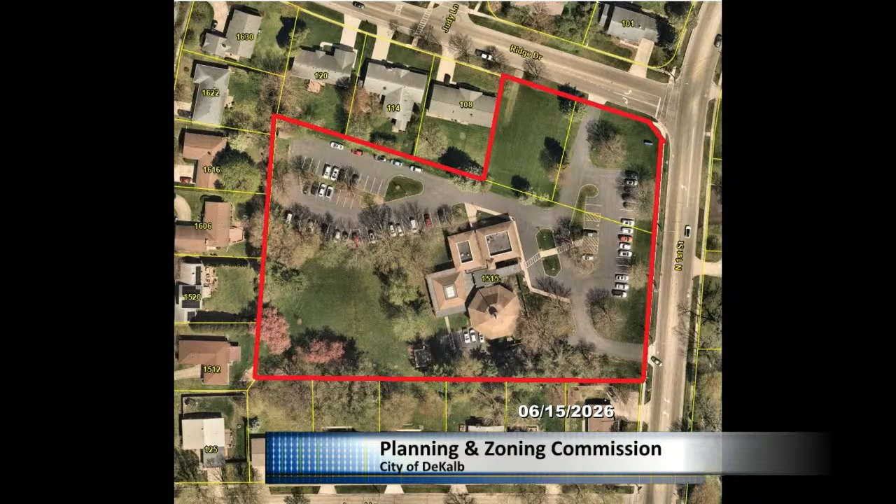The site is zoned single-family residential, and a church is a special use there. When the church was built in the late 60s, it was a permitted use in that district, so it was allowed to continue, but with any addition or parking to the building, that requires a special use, which they've complied with. They discussed the capacity of the church as needed, increased capacity. According to the background materials, a sanctuary would be up to 350 people, so they need additional room for that, additional classrooms, gathering spaces, restrooms on both levels.

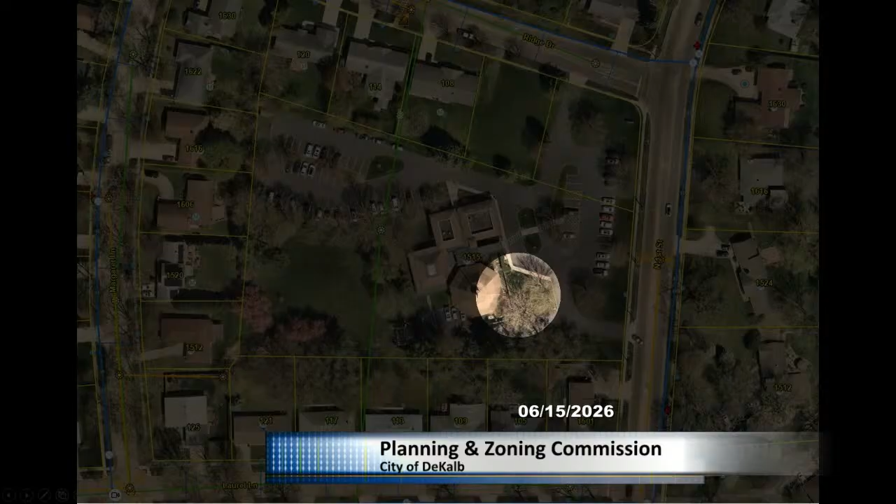The parking situation, which was mentioned, they're adding some parking. You can look at the aerial here, a lot of parking behind the church and some up front. They're expanding a little bit more in the front to get easier access to the front of the church for members coming in. You can see the new parking layout here, a better design and layout for the people still parking behind.

They're going to have a stormwater detention basin in the southwest part of the site to retain the water from the additional parking and the existing site. They'll have catch basins throughout, so the stormwater drainage will improve.

The home right here at 108 Ridge is probably the one most impacted, there's going to be parking next to it, but they are proposing a privacy fence, 6 foot high, right along the property line and a little bit to the south too, with landscaping in there to screen the cars and the lights from the cars from the home.

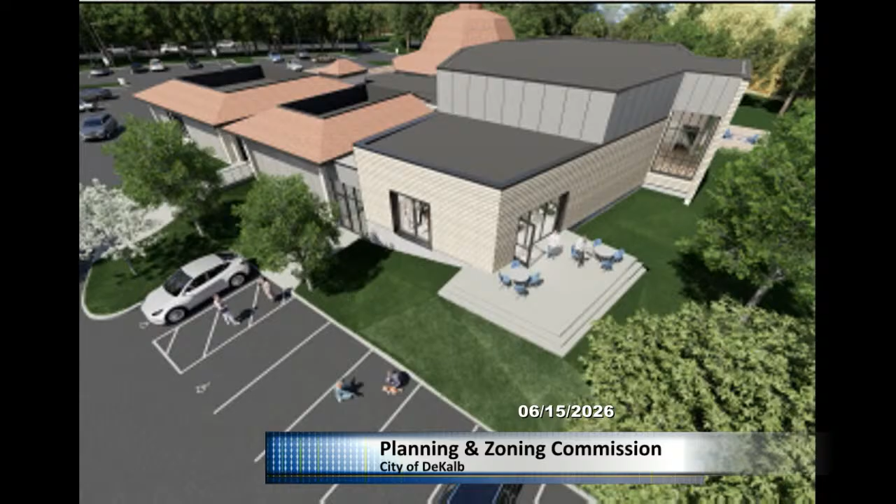A few trees will be lost with the expansion, about 7 trees with the parking lot expansion. 2 trees right between the parking lot and North First Street will be saved and will not be touched. They'll remove about 6 trees for the detention basin.

So the site will be compatible with the surrounding area. It's surrounded by single-family residential. They meet all the criteria for a special use permit in terms of impact to the neighborhood. They're meeting the UDO requirements. They have adequate parking, more parking, some more convenient parking. They're going to have stormwater detention to accommodate that. They're providing screening where it's required in the UDO. We did receive a couple of comments, but we believe they meet all the criteria for the special use.

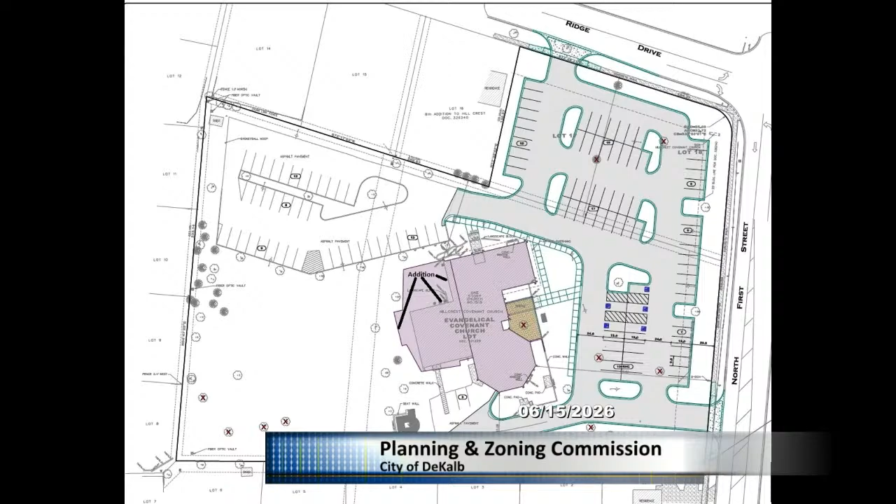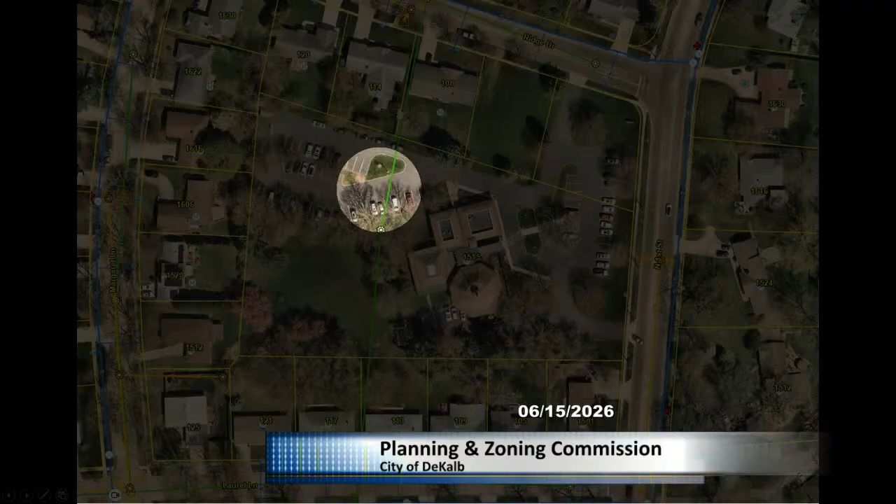So we did receive a few emails, one from Dennis and Beverly Heaney, 1519 Margaret Lane, which is on the west side of the church. And then we received an email from 108 Ridge, from Dwayne Brown and Jackie Brown, with concerns about screening of the new parking near their home and lighting also.

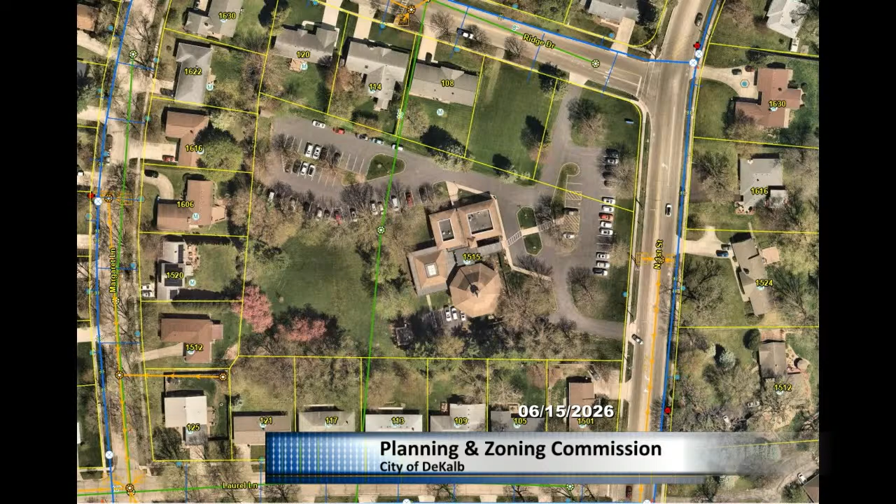I don't know if they're in attendance tonight, but the church met with them, and I did respond back to the email, copies in your background materials. I don't think they saw the revised plan, but there's a plan that shows a 6-foot-high privacy fence, and the church is discussing options of what type of fence they may want, maybe white vinyl. We just require screening, a 6-foot privacy fence. There'll be landscaping in there too to buffer and screen the fence, so that will screen any lights from the vehicles.

So we're recommending approval. There's a sample motion prepared that approves the plans described, and also has a general condition that matches the UDO, that the lighting be installed to prevent glare on adjoining properties, particularly 108 Ridge, per the approval of the planning director, with cutoff lenses on the lights so the light shines downward and not horizontally, which is a UDO requirement. I know the church mentioned they met with the resident regarding what they're going to do to accommodate them, so we're convinced that something will be worked out with the residents. Happy to answer any questions the commission has.

Any questions for Dan? Mostly I'm just concerned about the one neighbor with the lighting. So you're going to have shielded lighting that would aim downward, not horizontally into there, and they'll probably not have light standards right in this parking area - maybe they'll be off a little bit, that's the plan. Would it be like low-level lighting, or maybe they can explain what lighting they're proposing.

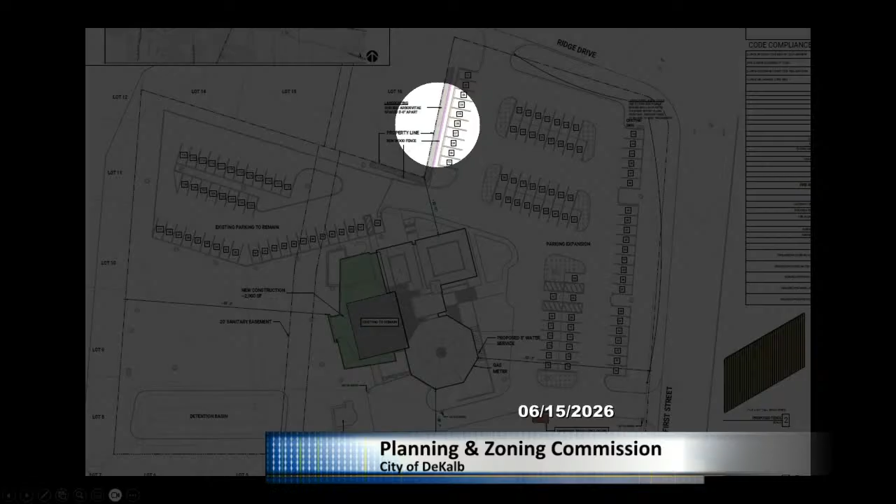And the lights would go directly into the Browns' home there - except the privacy fencing will block that, right along here, you can see it highlighted in purple. The notes say a 6-foot-high privacy fence with landscaping, so that would block that out.

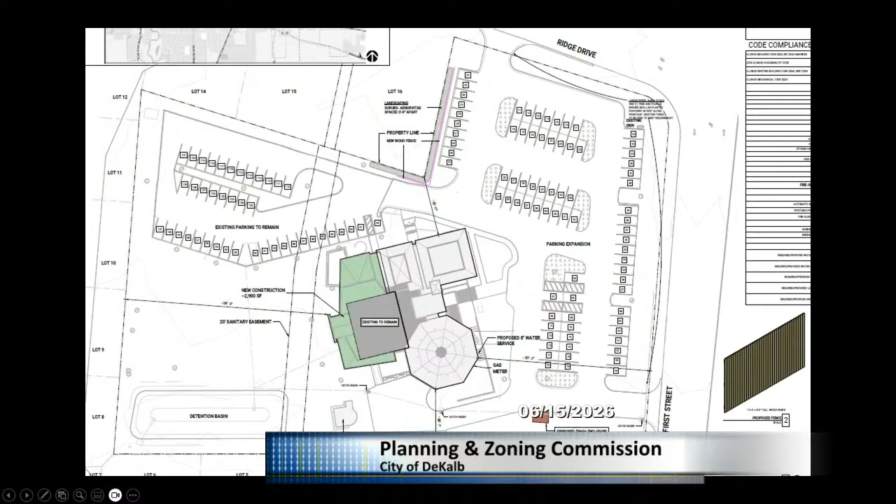If we need to, we can provide a photometric site plan to illustrate the light condition that would be achieved. That's through the required design permit, they have a photometric plan - there's a certain range you have to be in, but it's for the whole parking area, so they can cut back on the lighting poles next to that home and just move them further back. My impression is they were in favor of it, they just were concerned about light pollution, which I don't blame them, and it sounds like we've kind of met that requirement, take care of it.

Is this the time for public participation? Yes, so if anybody in the public wants to speak to this issue, you can come to the podium and state your name and your address.

Are you all Hillcrest Covenant?

All right, we're closing the public hearing. Now I'd like to open it up to the commission to ask their questions, that you've already asked, I'm sure. But if you have any other questions that you want to address to the city.

I would like to ask, how are you going to handle it while construction is going on, when that happens?

Dave Jafellers, general contractor for this project. All during the construction, we're going to have a construction fence around the area for security, and we will keep it up during the whole duration of the construction. We will be on site making sure that the site is safe and secure, so we don't have to worry about people getting in or out of it. So that will be kept up and kept in place until we can occupy the building.

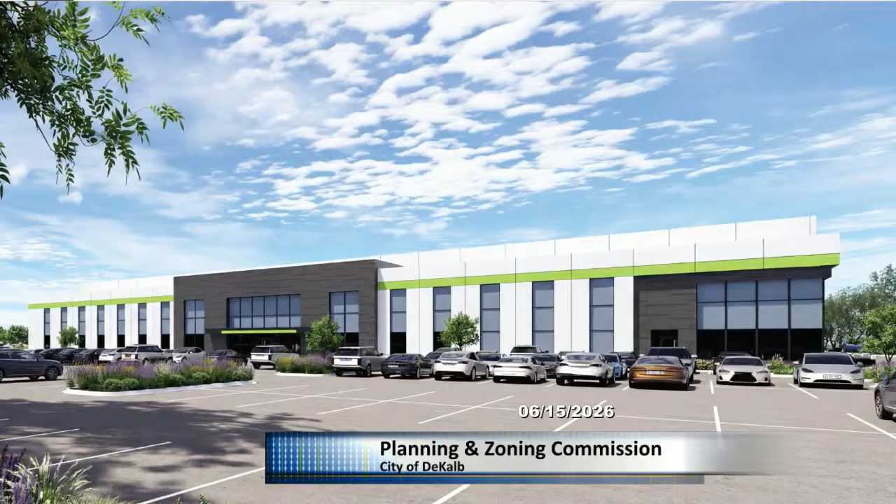Good evening, my name is Steve Miller. I'm with Venture One, here to talk about the plan development and final plat suit for Park 88, Unit 5, at Fairview and Macomb Drive. This is a new building that's gonna be going up out there. There are 2 parcels here, roughly about 50 acres between the two. We're proposing to put on one of the parcels, which is 22 acres of the site, about 186,000 square foot manufacturing facility. We're under an NDA, so I can't give a lot of information about it, but it is a manufacturing facility. They are looking to be operational next year, Q2, Q3. That's really about it for this part. Any questions, I can certainly field them.

Can't tell us who it is, huh? I can't - well, I could, but I like my job. Okay, okay. Dan, you have?

Yes, Chair, I'll just go through it briefly. So what we have is a preliminary final development plan and final plat in Park 88. It's 2 lots. One lot is here on the plat, and one lot's here in red, which will have the manufacturing building on it. You can kind of see the Park 88 marketing material, but you can see where this proposed building will be - those 2 lots are shown in red. You can see the proximity to 3M and Target right there at the northeast corner of Macomb and Fairview Drive.

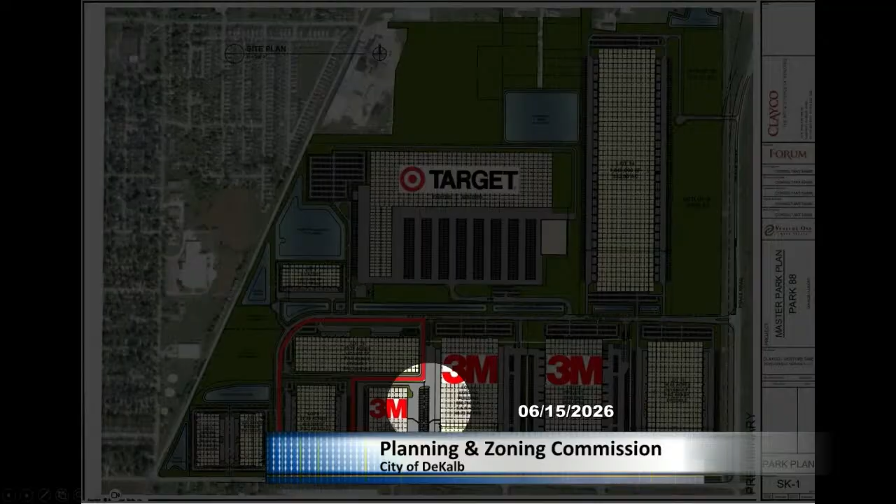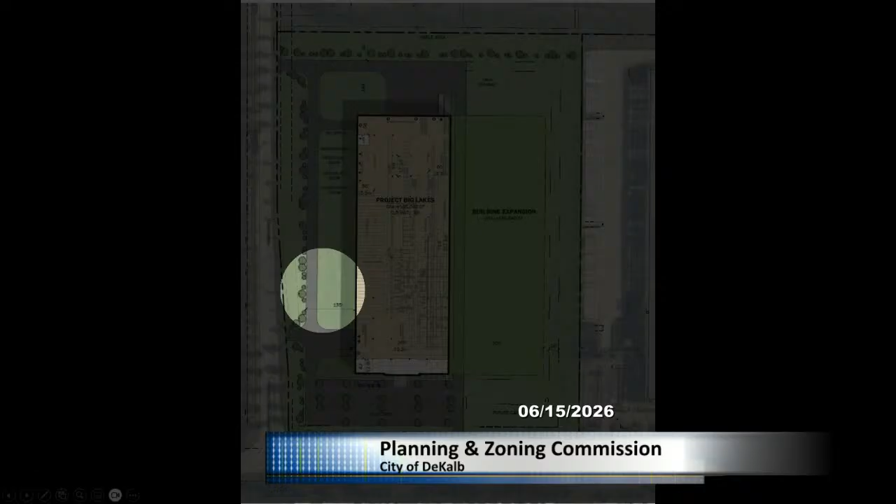So the site plan shows a manufacturing building, over 186,000 square feet on Lot 2, which is about 21.5 acres, to accommodate a large manufacturer. They do show a future expansion to the east, about 185,000 square feet. Parking on the south end for employees and visitors, with access to Fairview. Looking at the plan, they have a couple access points on Macomb - the north one mostly for deliveries and trucks, and the southern one would be for that too, with a connection to the visitor parking area for employees.

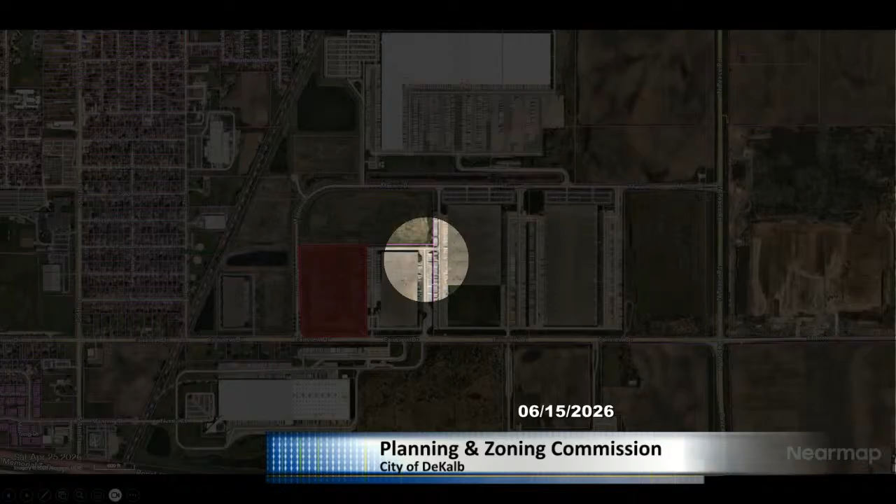Detention's provided off-site to the northwest in this pond here, so that's accommodated, all set up and planned out when Park 88 was constructed and planned for. So this is just another lot and continuation of the development.

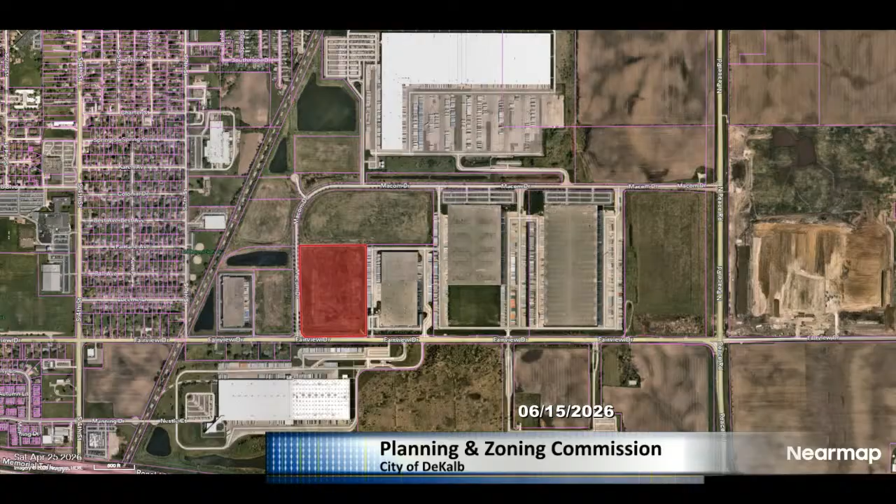There's plenty of facilities provided out there in terms of water, sewer, stormwater drainage, electric, everything. So that's really set up nice for that type of use at that location. They did provide a rendering of the building and generally what it will look like, meeting all the requirements in Park 88 in their planned development. So staff's reviewed this. There's 140 parking spaces provided. We've taken a look at this on the level of review.

They're going to be submitting still final engineering plans. They like to start work pretty soon, start grading. It was mentioned in July, operating by the early middle of 2027. Yes, so prior to issuing any permits, they'll have to address all staff comments, detailed engineering plans, landscape lighting plans, and then recording of the final plat too, which is part of the review of the plat. Again, it's in your background materials, but this shows the 2 lots with all the necessary easements on there, continuing the setbacks and easements on the adjacent lots to the east. So we'd recommend approval. The sample motion is there for the commission.